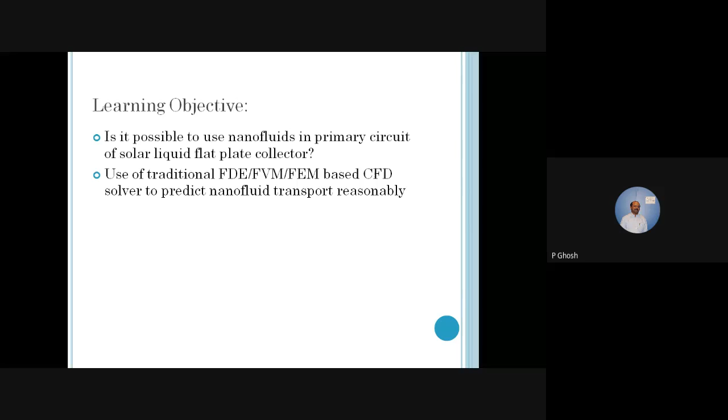First, let's see what are the issues in thermal engineering today. If you just try to jot it down, then: environmentally efficient and environmentally responsible, cost effective, compact devices for energy security today. This may not cover all aspects for this FDP, but heat exchangers, boilers, nuclear reactors, automobiles, wherever thermal energy is getting transferred or utilized, material processing, heat sinks, and solar thermal also, for example.

So what is the remedy? We have to make it more efficient as well as environmentally responsible. So how can we achieve that?

We have to search for new working fluids which have better thermophysical characteristics, better surface heat transfer with a low pressure drop. These are the two keywords: you can get better surface heat transfer, but with low pressure drop, and we have to balance between these two - what is the heat transfer augmentation and what is the pressure drop it's causing, and how we can make it cost effective and reliable. So these are some issues and concerns in thermal engineering today.

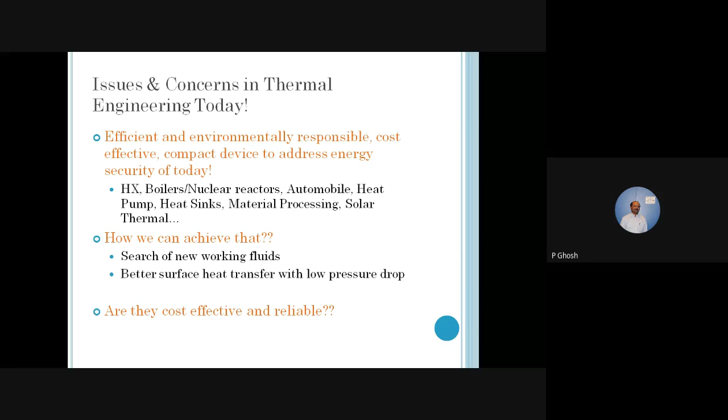Let's see now what is a solar water heating system, or what is a nanofluid. We have been talking about nanofluid. Nanofluid is nothing but a colloidal dispersion of nanometer size particles present in a liquid like water, ethylene glycol, etc., called nanofluid. So you have small particles, very small, nanometer size, that is 10 to the power minus 9 meter size, which you can't see with naked eyes, dispersed in a liquid.

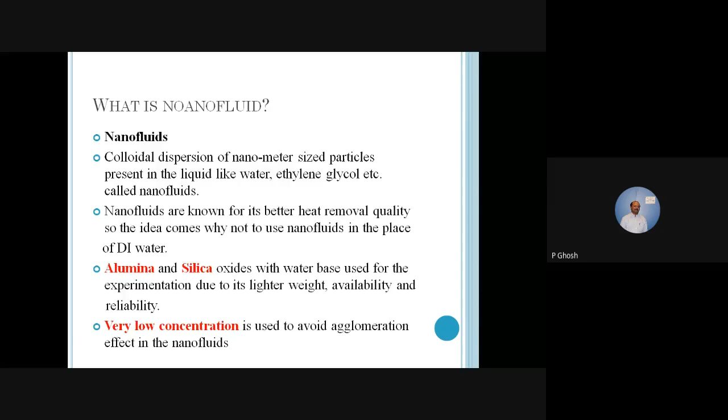Now let's see a typical solar water heating system, which will have a collector array, and there is a pump which is circulating the water, and ultimately it goes to a storage tank, and the hot water is taken for use. There are some vents and cold storage, makeup water, etc. And there are auxiliary heaters for when water or sun is not available, so you can use those heaters or auxiliary system.

What I am trying to say is that instead of this heater, if you put a heat exchanger there and pass the nanofluid instead of water, there will be a primary circuit where the nanofluid will basically be. It will not come in contact with the water, because you just put a heat exchanger here, and one side will be water, one side will be nanofluid. The water will get heated by the heated nanofluid, and that hot water will be supplied for use. So that is the whole idea of this solar collector primary circuit.

You use a nanofluid. Why? That is the major question. If you see the temperature distribution of a flat plate collector, generally these are the tubes where the water is flowing, and this is brazed with a collector absorber plate where the solar radiation is falling, and there will be a top cover, etc.

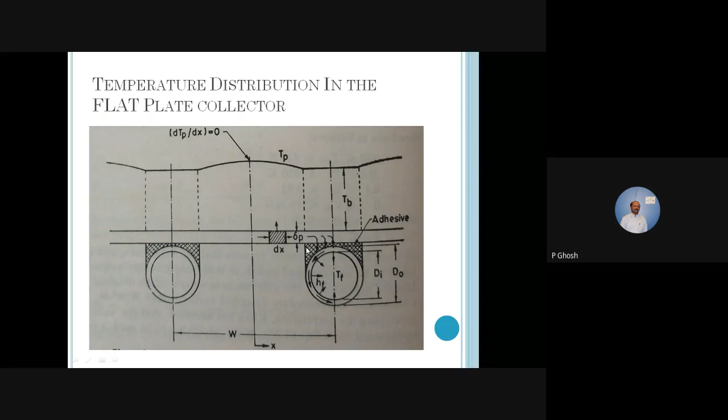Why are we so fascinated by this? The reason is we have done some thermodynamics and heat transfer analysis. This shows the efficiency parameter for a flat plate solar collector at various flow rates - from 0.5 to 2, the efficiency becomes 48% to 52% for normal water flow rate. Now, using the same mass flow rate but with a percentage concentration of aluminum oxide nanofluid, the efficiency goes up to 54%, almost a 15-16% increase.

This is without a mini channel, just a normal tube, using nanofluids. So nanofluids can be a potential candidate if used in a primary circuit, and you will get better performance on the order of 15%.

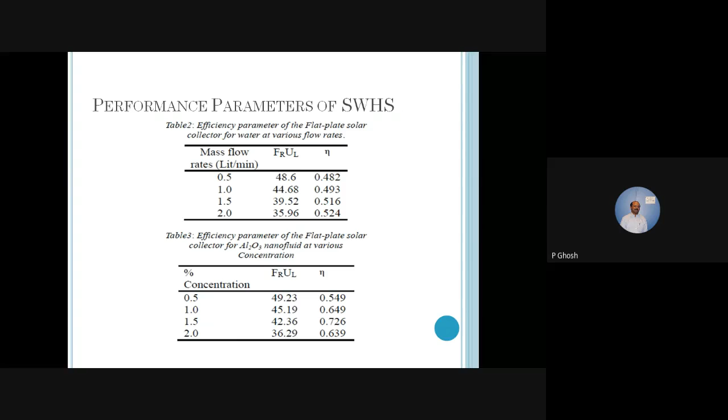Now in this presentation, the main objective was CFD and how we can utilize nanofluid performance using a mini channel, as we have seen. One is the pure heat transfer perspective - we are changing the number of fins, getting more fins attached at the cost of higher pressure drop, as well as changing the working fluid. Before you do an experiment, you have to do some analysis to be sure your design and calculations are correct. So these days CFD is an effective tool.

Or is it? We have to find that out. It may look a bit negative, because I have posed the question: is CFD an effective tool for nanofluid transport? The reason is...

Traditional CFD will find difficulty, because traditional CFD is based on the continuum hypothesis. This continuum hypothesis for nanoparticle size - for example, we know the boundary layer thickness is at the millimeter level, that means 10 to the power minus 3. We are talking about particles at 10 to the power minus 9. So even if 100 particles agglomerate together, it will still not be able to do anything in the boundary layer, because 100 into 10 to the power minus 9 gives 10 to the power minus 7 - much smaller than the millimeter level. It's just like it can puncture, but it will not be able to shear off.

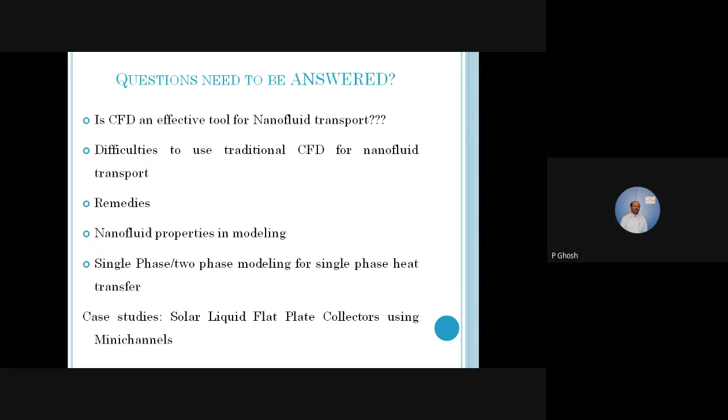And one possibility is you consider a well-mixed solid situation, that is a homogeneous model. Now, in a single phase or two phase model, for single phase heat transfer itself, there is no two phase heat transfer—we are not making liquid to vapor or vapor to liquid. So normal single phase heat transfer, is two phase modeling possible or not? We will see some case studies we've done in our lab, and some students have performed their thesis. So we'll see that for a liquid flat plate collector using mini channels.

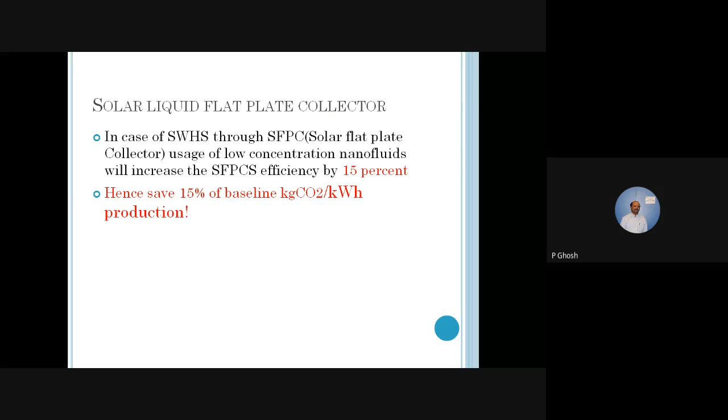Now we have already seen a 15% enhancement for the solar flat plate collector, and interestingly, this is based on kg of CO2 per kilowatt hour production—a 15% reduction there also. The calculation is something like this: you are using primary fuel like coal, gas, or oil to produce that amount of power, and if you use an electric heater to heat the geyser, you are reducing that. So straightaway you can get a 15% benefit if you use a solar water heating system.

As I was telling, the continuum hypothesis is applicable, but one particle is at nanometer scale while another is at micron level—there's an order of magnitude difference. If you want to model an earthquake or other large scale phenomena like ocean flow, this is a large scale phenomenon. Is the continuum hypothesis applicable or not? That is the question.

Really, CFD is based on continuum hypothesis, and continuity has to be validated. If you go to space where there is little atmosphere, CFD will not work—you have to use some kind of statistical model instead. Similarly here, there is such a large scale difference between the two species: one is nanometer level, one is a few micron level, and the boundary layer formed is millimeter level. So is continuum hypothesis possible? But surprisingly, the homogeneous mixture gives a decent result compared with experiments.

Now another question is that Brownian motion is basically random behavior. These nanoparticles—how are they going to be mixed? This is the random behavior of the particles. It behaves in an erratic way, and a nanoparticle, being very small, behaves in this Brownian motion-wise manner.

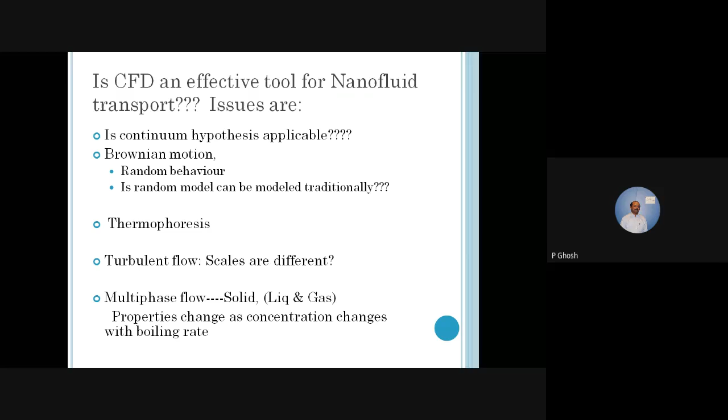So the remedies are, as I have been talking about, the homogeneous model, or two-phase model. In a homogeneous model, we consider that the nanoparticle and the water are in the same local thermal equilibrium. The properties are not changing at some space time, so if you take at x equal to something, the properties are going to be the same - it's in local thermal equilibrium.

The Brownian motion is nothing but the random behavior, and this random motion can be modeled traditionally with just random walk etc. models, but whether it is applicable for nanoscale or not, we are not very sure.

Now, properties change with concentration, change with boiling rate, but we are not concerned about boiling or two-phase phenomenon now. So we only have to consider how the nanoparticles interact among themselves, how they interact with the liquid, and how they interact with the wall of the duct.

So if you take properties of the nanoparticle, this comes basically from mass balance. Specific heat comes from the first law of thermodynamics. Viscosity is basically from experimental data or some kind of correlations, and thermal conductivity is different - people have observed that Brownian motion affects the thermal conductivity very much.

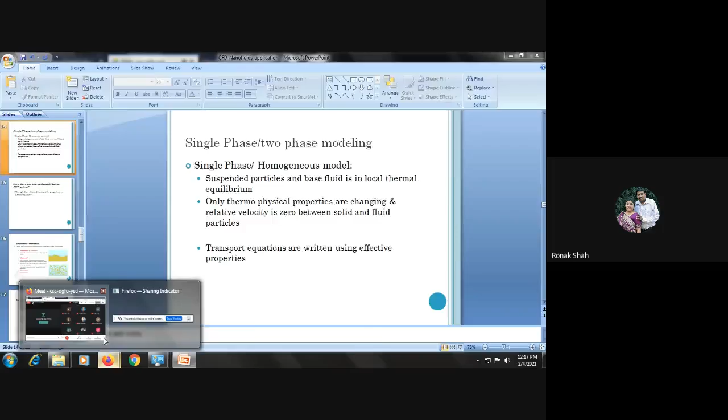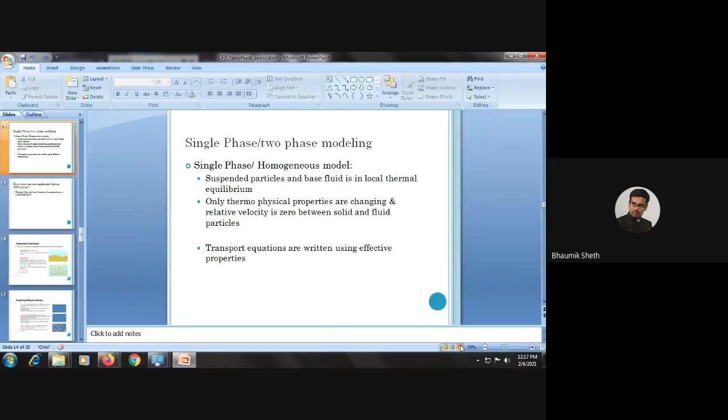So this single phase or homogeneous model is basically suspended particles and base fluid. This is in local thermal equilibrium, and we can model it such that the thermophysical properties are changing and relative velocity is zero between the solid and fluid particles. The transport equations are written using effective properties.

So if you can model flow through a tube, you can most probably model it using the homogeneous model. So the only change you have to make for nanoparticles or nanofluid is changing the transport properties. What are those properties?

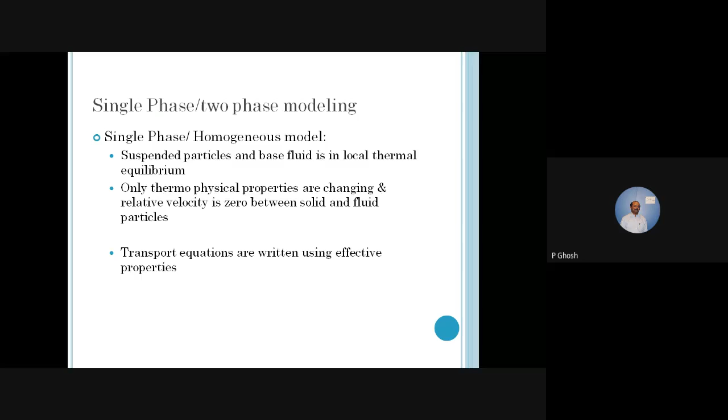Thermal conductivity, viscosity, specific heat, and density - let me give an example. If you're using a user-defined function in ANSYS Fluent, or any other software like CFX or StarCD, there are always options to write your own function for properties. In ANSYS Fluent, these equations have to be written in C, and you have to compile it, then you can use it basically like your normal pipe flow or tube flow situations.

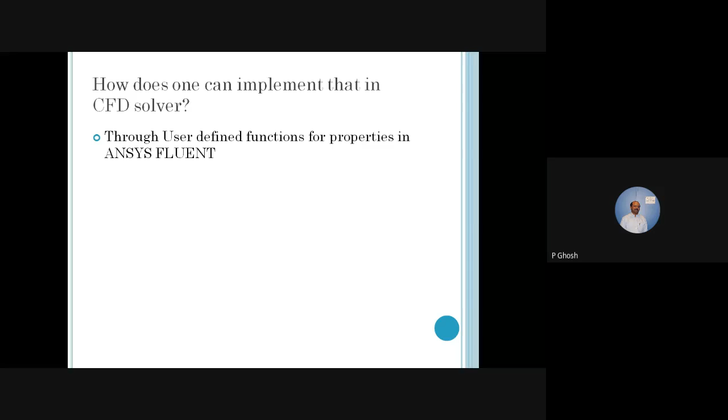So just imagine a situation where you're simulating in CFD for nanofluid. You take a tube and put a boundary condition there, with heat transfer taking place, and flow boundary conditions like velocity inlet and pressure outlet, with no slip at the wall. All these things remain the same, except in the user-defined function where you mention material properties - there you should use these correlations for density, specific heat, viscosity, and thermal conductivity.

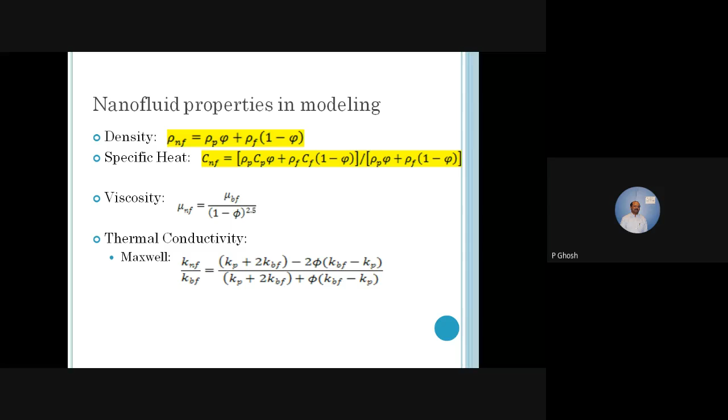If you want to use, for example, Maxwell's model, it doesn't consider Brownian motion, but the Koo and Kleinstreuer model does consider Brownian motion. So the Brownian motion effect will be more significant in the case of conductivity.

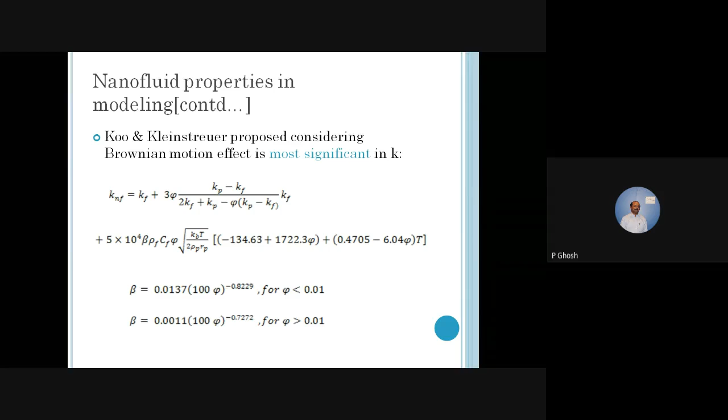So if you use this correlation written in C, just this formula, you have to use the function calls the software gives you - you can't just write K, you have to match those variables according to that, like if it's thermal underscore conduct or something like that. This gives you a decent result.

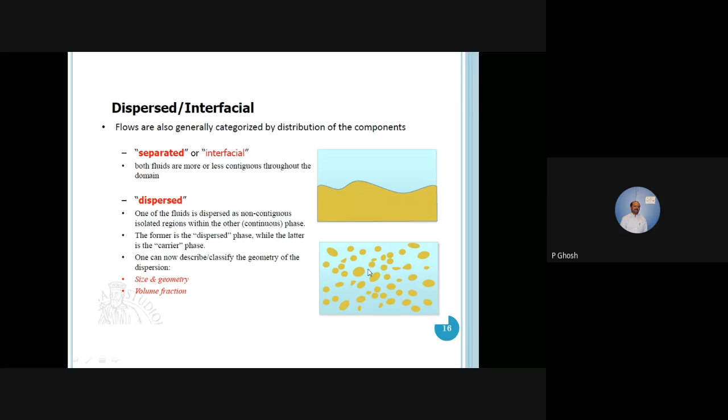Now, as I was telling you, there's a lot of controversy about whether these nanoparticles are going to be treated as a different species. Obviously it's a solid particle and there's a liquid, so water will be the carrier phase, and the nanoparticle will be in this phase - in a single phase there is no phase change of this dispersed phase. So we can consider what kind of coupling exists between these phases.

In a one-way coupling, that means it's sufficiently dilute that the fluid feels no effect from the presence of particles, and the particles move in dynamic response to the fluid motion.

In a two-way coupling, the nanoparticles - or any other particles, which is a generic concept - will have an inter-particle momentum exchange between the dispersed and carrier phase at the interfaces, meaning the fluid and particles have momentum exchange.

Now four-way coupling is where among the particles there is a change, and among the fluids there is also a change. So from two to four-way, you're going to take into account things like aerodynamic drag.

But my question is, if you have millions of nanoparticles, this is not going to change the momentum transfer, because that's only possible if the boundary layer gets affected - and the boundary layer is not going to be effective here. I mentioned particles are 10 to the power minus 9, while the boundary layer thickness is 1 to 2 millimeters. So you'd need something like a million such particles together to be able to cut through the boundary layer - so it's not possible.

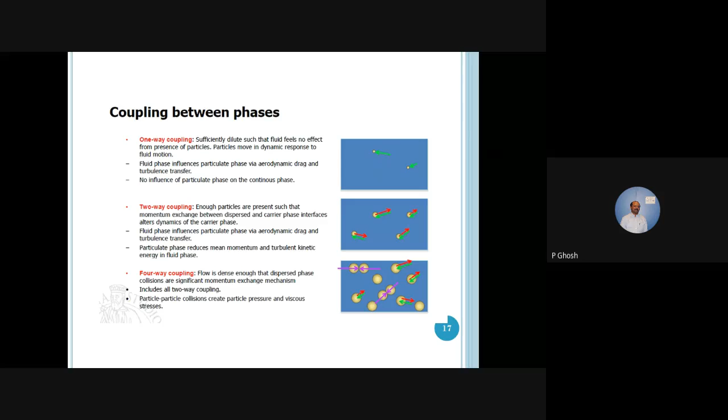Generally, in a dilute situation, you will get only one-way coupling - the fluid is flowing, and there is no change in momentum due to the particle's presence in the bulk motion of the fluid.

Surprisingly, some people - including some papers, and some of my students who worked on this - consider a two-phase modeling approach where there is a slip velocity between the nanoparticles and the fluid. There are ways to calculate that, and there's a lot of literature on this slip velocity concept.

The slip velocity means that at the wall, the velocities will not be the same. We know the velocity at the wall for the fluid will be zero, but there will be some velocity for the nanoparticles. The difference between these is called the slip velocity, and these slip velocities can be quite appreciable - so that's the question mark here.

Generally, in this two-phase modeling approach, continuity, momentum, and energy equations are written for the mixture. Only at the wall do you consider that slip velocity exists - instead of no-slip condition, you consider that some slip velocity exists between the nanoparticles and the fluid.

Surprisingly, the continuity, momentum, energy equations are considered as a homogeneous mixture or mixture model. So your continuity equation, momentum equation, energy equation will be written in the homogeneous model, where you modify these properties in the material property section of the commercial software with a user defined function, and only the slip velocity has to be considered between the nanoparticles and the fluid. These are the two-phase modeling approaches people have considered as of now.

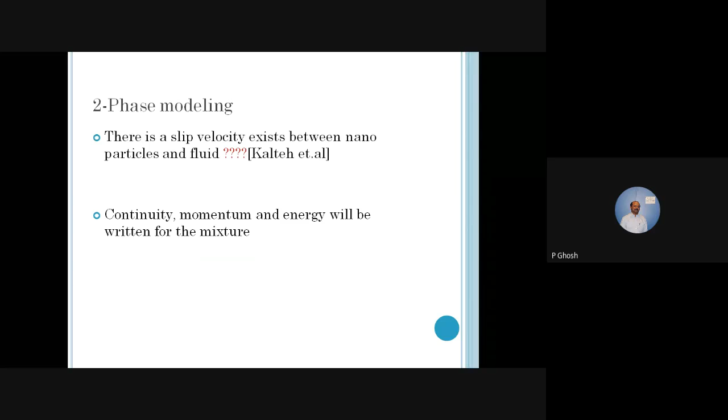That is my recommendation - use single phase mixture, homogeneous mixture model only. Very simple: if you know how to model your normal water flow or normal air flow, then instead of that you just use mixture properties, the way you put water properties. Similarly, you have to write your own user defined function and key in those expressions whatever you feel comfortable with, because every expression has a range of applicability. So this applicability has to be there.

Now what is mini channel? Remember what we started with, that there are two-prong approaches. One, we are changing the working fluid, and also using more number of fins in a solar flat plate collector. So the same diameter tube can't be used eventually - you have to use a lesser diameter tube, 3 millimeters or less than that, which we call the mini channel. It's not micron, it's mini.

So these are some mini channels: 1.41 internal diameter, 0.87 internal diameter, and 0.71 internal diameter. This has been developed in our lab. It's nothing similar, like a capillary - if you use a capillary tube, this will be the same. You can machine it also.

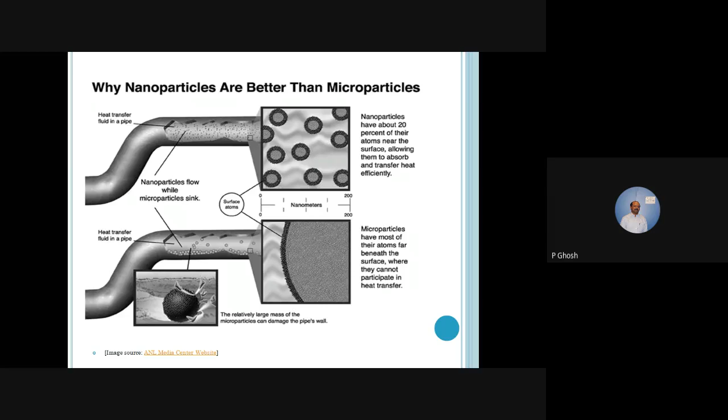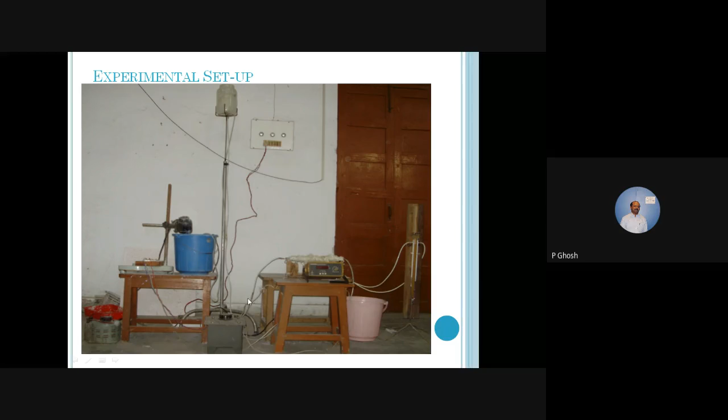So this is like a very old experimental setup - some students have done this in 2009 or 2010 or something, that was the mini channel. Whatever you have seen, we had some nanoparticle, and we are mixing this nanoparticle with some stirrer and passing that and measuring the pressure drop, etc. Temperature monitoring, etc. is also taking place.

The Nusselt number for water, if you take this zone in a laminar region with constant heat flux, this is going to give you around 4.36. We got almost 4.5 to 4.6 both experimentally and numerically. So this is a laminar zone, and if you are taking a constant heat flux situation, we get the same kind of result.

One thing you have to understand is that the Nusselt number will be same, but the heat transfer coefficient will be higher for the mini channel. The reason is if you write Nusselt number equal to HD by K, since diameter is small, the heat transfer coefficient becomes more. So if it is a 3 millimeter tube and your Nusselt number is 4.7, same as the normal tube, you are going to get a higher heat transfer coefficient in case of smaller tubes.

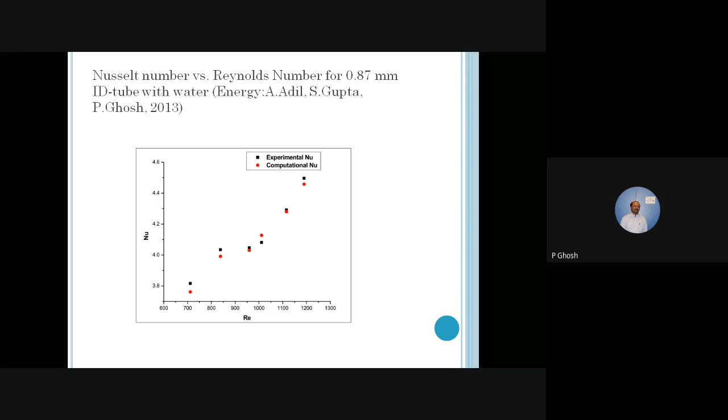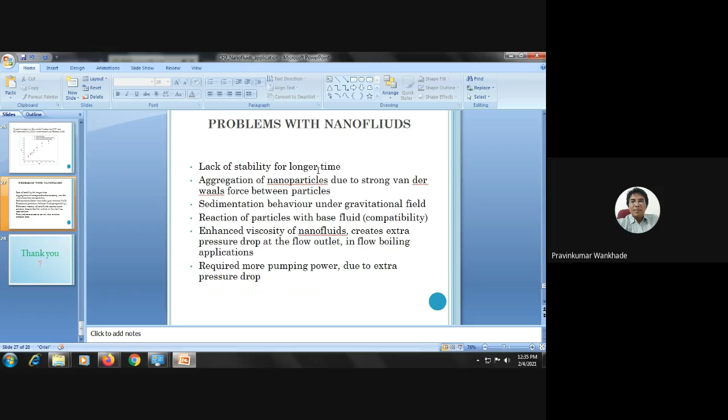Okay. Anything you want to ask? Anything you want to ask anyone? Pramit sir? Anything you want to ask? Pramit sir? Hello, Pramit sir? Just a minute, sir.

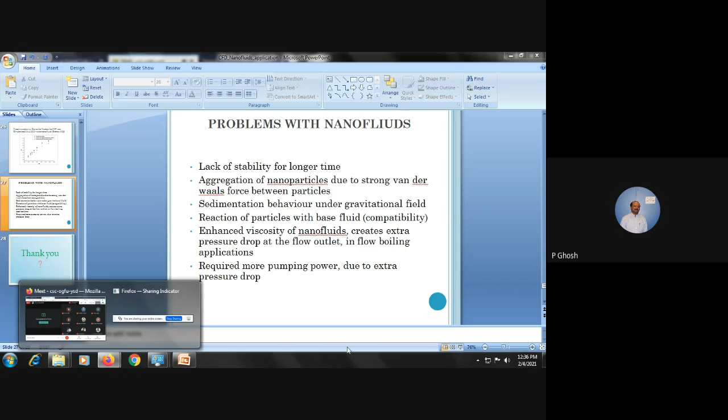Should I start? Yes, sir. So what I was telling is, are the slides visible?

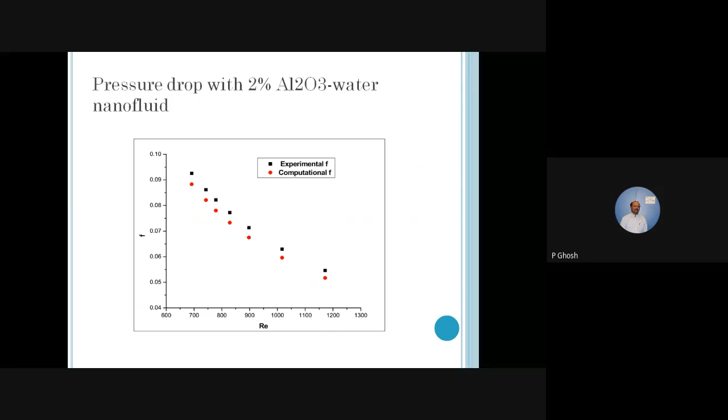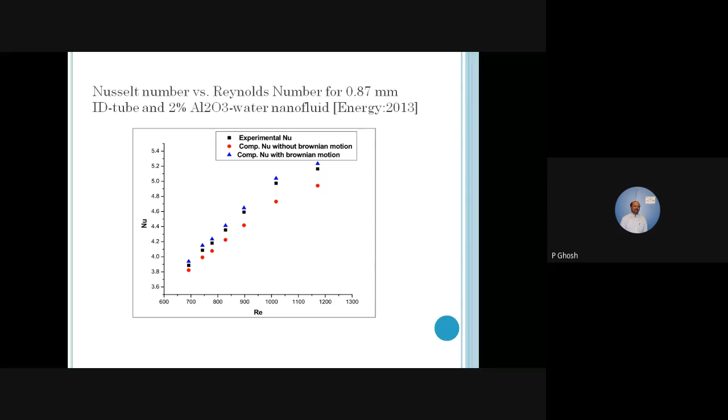But nanofluids have some problems. It looks very attractive, and the pressure drop is also not that high. If I go back to my friction factor, experimentally it's almost the same - water follows 64 by Reynolds number, so it will not change much even with diluted 2% aluminum oxide, but it gives a fairly good enhancement. Like if you saw that was 4.7, here you are getting 5.2, and when you get the heat transfer coefficient, it will be more than 30% change in the heat transfer coefficient.

But nanofluids have some problems like lack of stability for a longer time, aggregation of nanoparticles due to stronger van der Waals force between the particles, sedimentation can happen due to the gravitational field, reaction of particles with the base fluid compatibility, and enhanced viscosity for the nanofluid creates extra pressure drop. But this is not going to be the case in our case. So whatever we have proposed, the more pumping power due to the extra pressure drop is not going to be the case in a solar flat plate collector.

So in a solar flat plate collector, we can take a two-prong approach: use a larger number of smaller tubes, and that will give you a more number of fins to operate with a slightly increased pressure drop, but the efficiency is going to go up significantly. If you use a nanofluid with a 15% enhancement, and if you use more mini channels, that will give a 30% kind of enhancement in the efficiency.

With this, whatever I have started, my objective was to use CFD. The first objective was, can we use traditional CFD for that? So we found out a remedy that we can do with the homogeneous model, and I suggested the homogeneous model where there is no coupling. The nanoparticle and the base fluid is in the homogeneous state in local thermal equilibrium, and it can be easily implemented in any commercial software.